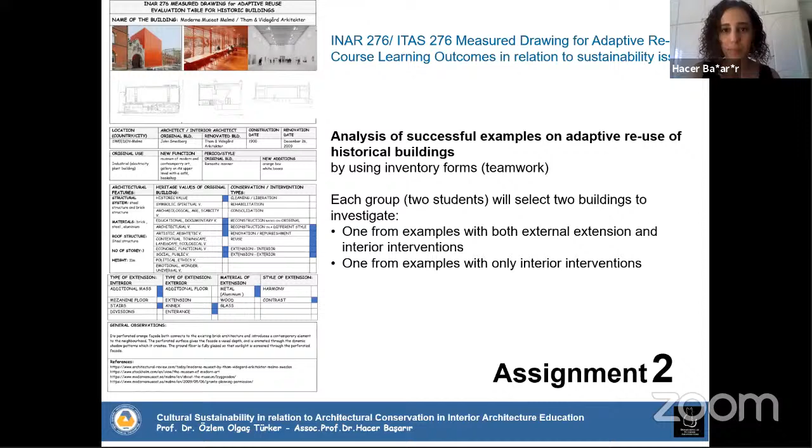Yes, Özlem hocam. The learning outcomes in this assignment include personal observation on values of cultural heritage through case studies. So they go through photographs, architectural drawings, and 3D visuals. Observations on types of interventions to historic buildings through case studies.

Critical thinking on cultural heritage, critical thinking on sustainability through continuity of cultural environments, and to learn about international agenda on conservation approaches to historic buildings and environments, conservation and reuse of historical spaces, buildings, areas, and additionally, the role of interior architecture in architectural conservation and adaptive reuse.

Following assignment 2, assignment 3 includes another presentation. Here we gave students some key criteria on conservation, and we expect them to discuss 3 different successful examples

according to these 9 criteria, which include minimum intervention, minimal loss of fabric, reversibility, compatibility of new use, explicitness of alteration, honesty and appropriateness of repair and restoration, and also, of course, sustainability and devising defensible solutions.

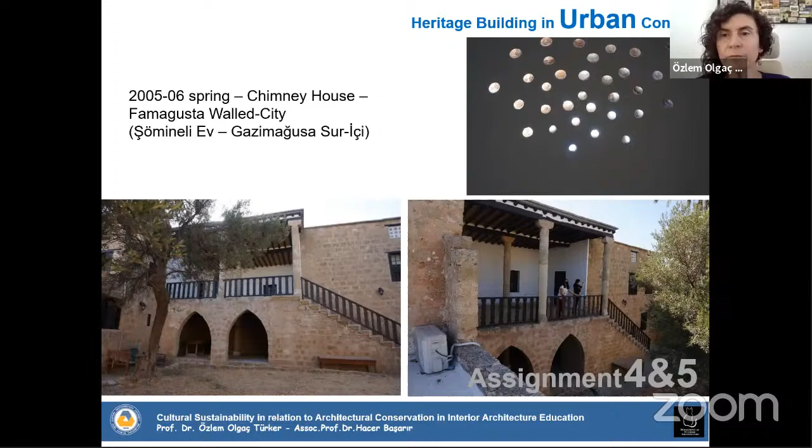Another experience is the documentation experience on heritage buildings through these on-site measurement practices. This supports students in spatial interaction in heritage buildings, using measurement tools accurately, and as Hacer Hoca mentioned, teamwork and site work experiences. You can see some examples when our students had the chance of face-to-face education and they were measuring arches or making triangulation on site.

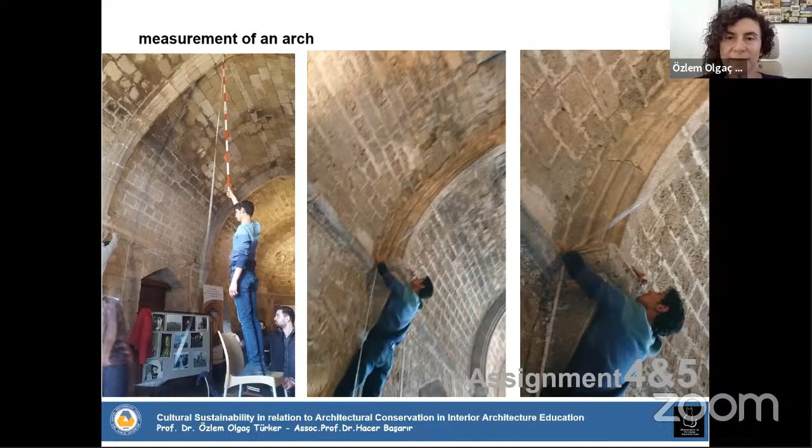Some other examples. And before going to the historic site, in order to understand the logic of measuring, we started the on-site experience from our studios in contemporary environments first, and then we took them to historic buildings.

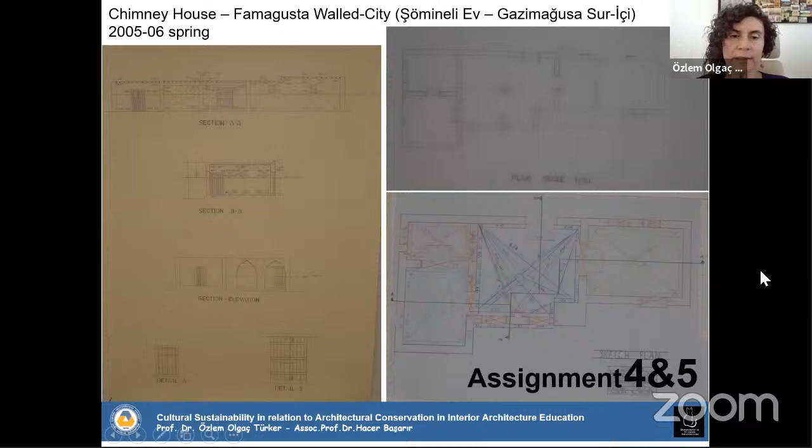The documentation experience on heritage buildings also continued with the measured drawing practice, which supports students' ability in making scaled measured drawings of heritage buildings, accuracy of drawings and the importance of this in continuity issues, and again, teamwork. Some examples can be seen here from Chimney House: sketches of students, measured drawings in scale, plans, sections and elevations. Another church example's drawings, some other samples.

And the last 3 semesters, as you know, we had an online experience, and this online experience had to support the students to achieve similar course learning outcomes, but this time through different experiences. They were not able to go out of their houses. They didn't have a chance to get measuring equipment. So we had to create new assignments for them.

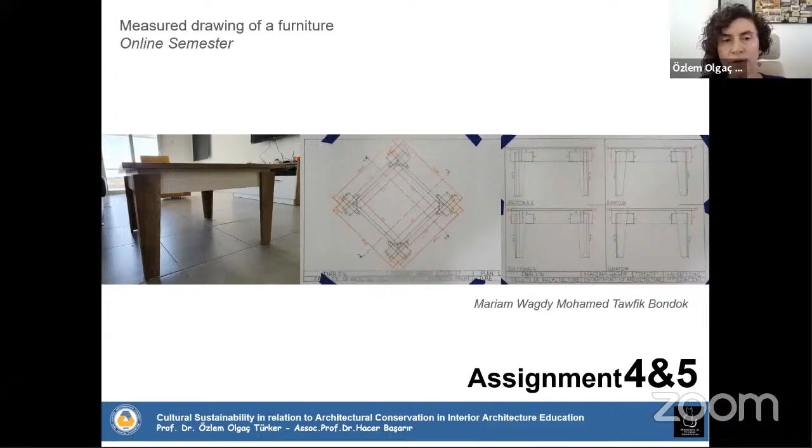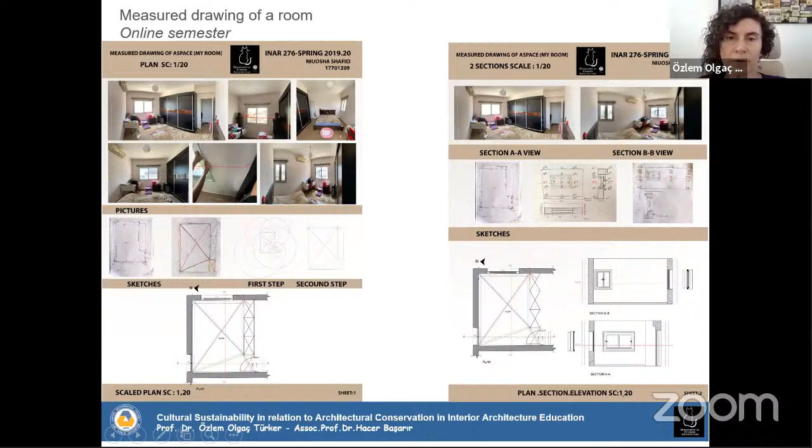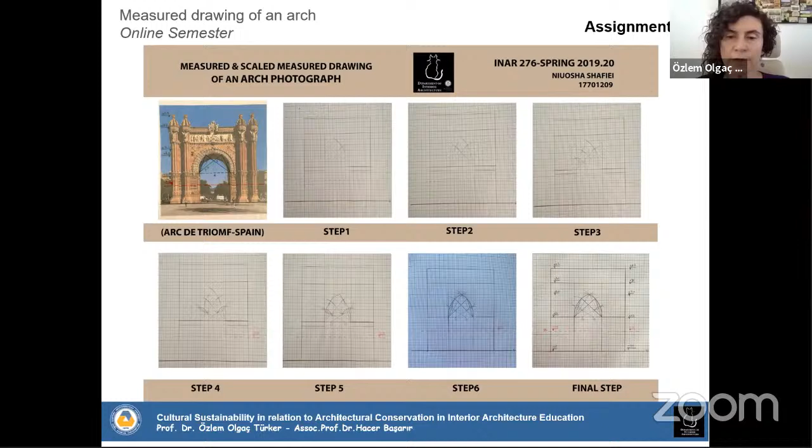So they started measuring their furniture and then their own rooms and other rooms in their living environments, dormitories or their houses. And by using the same triangulation or datum line techniques, they repeated those learning outcomes. Some examples. And because they were not able to go to historic buildings on site, we asked them to have photographs taken from just across an arch, and they experienced the geometrical methods of arch drawing through photographing.

And lastly, the jury experience was done in heritage buildings when we had the chance to, and this also supports the students' understanding of heritage buildings, the continuity issues, spatial interaction, and infusing life into these examples. As I mentioned, one example, a jury done in Bandabulya Marketplace.

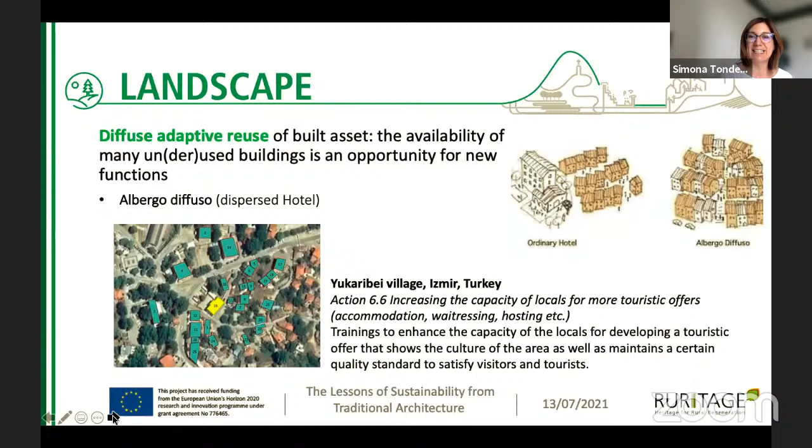Another example is the use, for what concerns the landscape integrated management, of a diffuse adaptive reuse of built asset. So in rural areas, we have this availability of many underused or unused buildings, which is also an opportunity for thinking about new functions. And an example, again, from Izmir, is the idea to plan a dispersed hotel from the idea of albergo diffuso, where to promote the availability of rooms in a small village to host tourists, and to give them an experience which is also an experience of real life, to engage them really in the community, to make them know the traditional art crafts and traditions of the community. And this is also accompanied by training courses to promote the capacity of the local citizens really to build a business from this.

Pilgrimage, of course, gives us many opportunities of reusing buildings. In one of our case studies, which is Camino de Santiago, we have seen that there are very important buildings, monuments that can be reused for these purposes, sacred spaces. But also what is interesting to see is that there are many buildings along the routes that can be reused for restaurants, bars, shops, and so on. So in the case of Camino de Santiago, we have seen how the rural heritage hub, our core place for the heritage activities, is placed in a monastery, which is also used as a hotel which can also host events. So this multifunction reuse of buildings is really working.

For what concerns resilience, of course, the reuse of buildings is one of the main features, because in our case studies, we are working with natural hazards. Appignano del Tronto suffered from the earthquake in Italy in 2016. So there were buildings that were destroyed, but this also resulted in abandonment by people. So the idea is now how to rethink buildings and also open spaces for making them available for the community. And one of the most important actions that Appignano municipality is developing is the idea of building a sort of hub for resilience, which is a mix of a scientific center, a museum, a place where to learn, to make it become a sort of full experience for the community, and also for tourists and visitors.

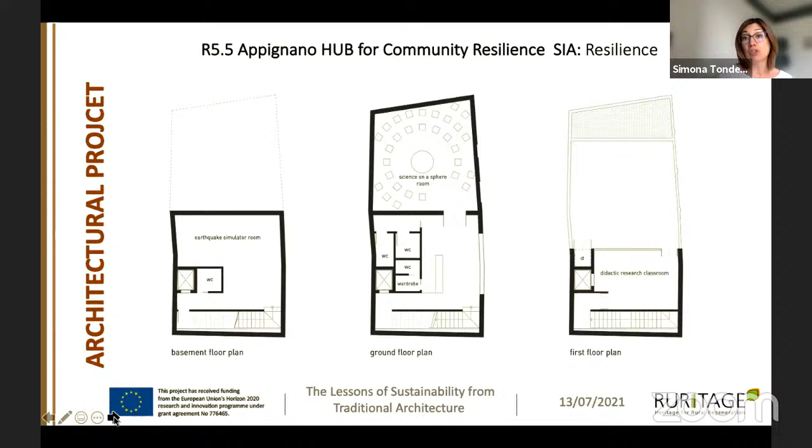So they have identified an old building. They are now planning how to use it. For example, having a simulator room for the earthquake. What we learned is that the risks should not be hidden away, but we should use them to educate, to train people to be prepared. And then we will have a place for educational activities, with didactic classrooms, so to have all the different experiences that can be offered.

For example, this is what is already present in one of our role models, which is in Crete, in Heraklion, where the earthquake simulator, hosted in the Natural History Museum, is one of the main attractions of the city. It's the second attraction after the Knossos Palace. So to say how education can also really become a point of interest. And the other one is from Trento, which is a science museum.

And then working on art and festival, we also have many other opportunities of reusing buildings and places. And what is interesting, for example, is to see how art performances can take place in spaces that are not thought to be dedicated to this, but how it is possible to have performances in open air or in pubs, in restaurants or in other venues that can really bring people to be more near to art and culture.

Another example from Slovenia is the Negova Castle, which is an important monument that hosts ceremonies, that hosts a museum, exhibitions, but also, again, our heritage hub, and where the community can find opportunities and inspiration for working on sustainable development.

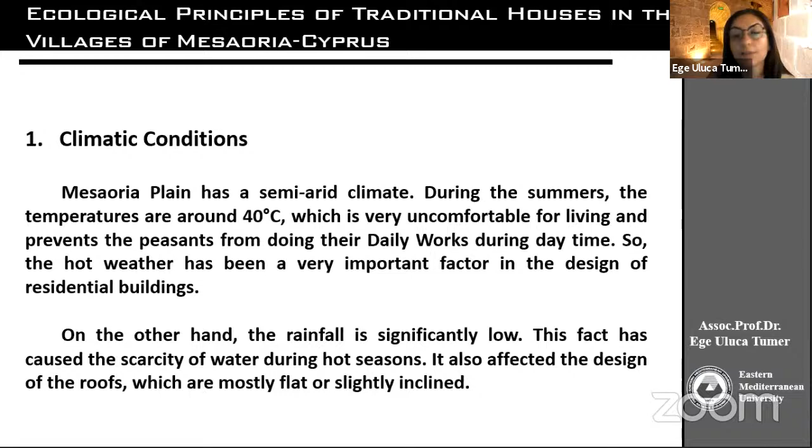As the rest of Cyprus, Mesaoria plain is very hot, especially during summers. It's around 40 degrees Celsius, and it's a semi-arid climate. It's very uncomfortable for living, and it prevents the peasants from doing their daily works during daytime. So the hot weather is really important in the design of the residential buildings. And also the rainfall is significantly low. And this fact has caused the scarcity of water during hot seasons. And it also affected the design of the roofs, which are mostly flat or slightly inclined.

And like many other villages, grain production and animal husbandry were the main economic activities in Mesaoria villages. Because of these production facilities, the rural building design developed according to them. We see big storage spaces for grains, barns and animals within the premises of the houses. We also see open spaces like courtyards, especially for dairy production and drying fruits, vegetables, tarhana, these kinds of products. And the main building material is mud brick or adobe.

This was the most available material. When you go to the mountainous areas, it differs. On mountains there are stone masonry buildings in villages, but on the plains it's all adobe. This was the easiest to produce and cheapest material in the region. The walls were built on rubble stone foundations, and they supported timber beams on flat mud roofs or slightly pitched roofs. Stone was rarely used, around doors, windows, verandas, and within closed spaces as supporting arches for the roofs.

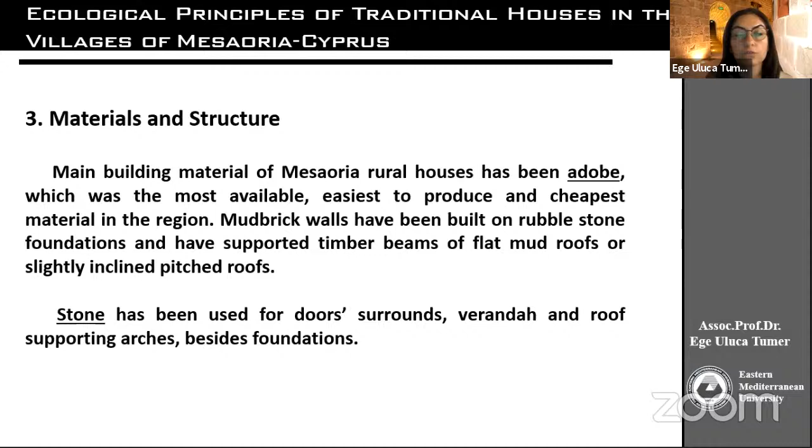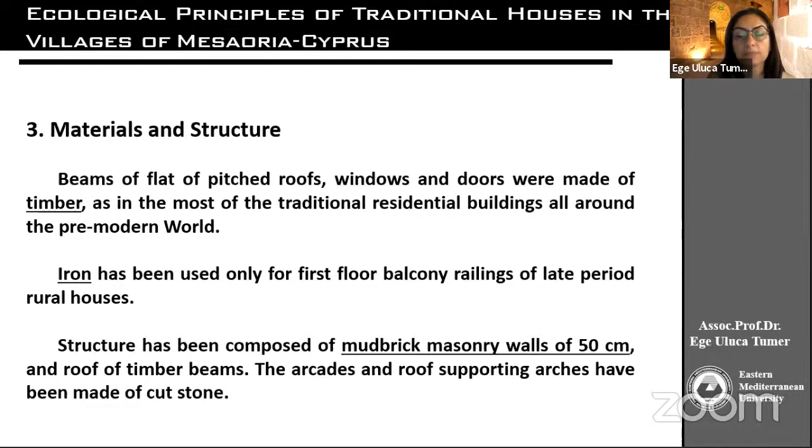So when we check the timber, as in many other Mesopotamian or Near East villages, we have flat or pitched roofs with timber beams, as in most traditional residential buildings all around the pre-modern world. Iron is very rare, only in late period balcony railings. And the mud brick masonry walls are around 50 centimeters.

So when we look at the design, we see a room is a modular unit, and besides that there is a very important space called hanay. The room was used as a modular unit arrayed in linear order on the ground floor, due to increasing demand, in early houses with an arcaded portico. If there was an upper story, it was mainly a single room called hanay in Cypriot Turkish.

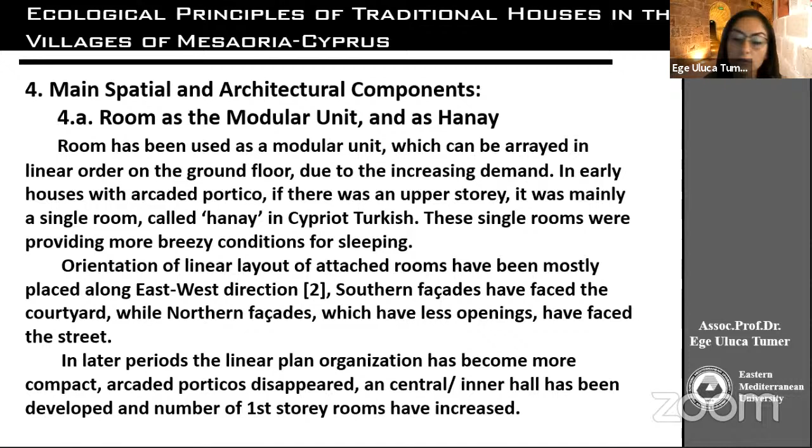Looking at orientation, these buildings were placed in the east-west direction. Just like in the first presentation about the villages of Eskişehir, they were located north of the courtyard. The southern facade faced the courtyard, while the northern facades, with fewer openings, faced the street. So the southern facade was the main facade, providing the best conditions during winter and summer. In later periods, the plan became more compact, arcaded porticos disappeared, a central inner hall developed, and the number of first-story rooms increased. So there was an evolution in the houses in this area.

Another thing: in the first presentation, it was discussed that the central room has been defined as hayat, sofa or salon. In Turkish Cypriot language, it's sündürme, a very specific name for the central hall between 2 rooms. So coming to the other main component, which is the arcaded portico, veranda, outer hall, or outer sofa.

This is the most prominent and characteristic feature of early Mesaoria village houses. These porticos, which were placed on the south, have been life-saving both during summer and winter. The semi-open spaces, as a circulation and activity area, have been used both for recreational and work-oriented facilities. This in-between area was shady during summer and caught the sunlight during winter.

Gülşen Hanım mentioned similar eaves within the houses of villages of Eskişehir. But in Cyprus, we can say that this area is much deeper, and as we say, it has arcades. The number of arches has been a way of understanding the wealth of the house owners, so this arcaded portico could be longer or shorter according to the richness of the family. This space, this arcaded portico, has been like 3 meters deep.

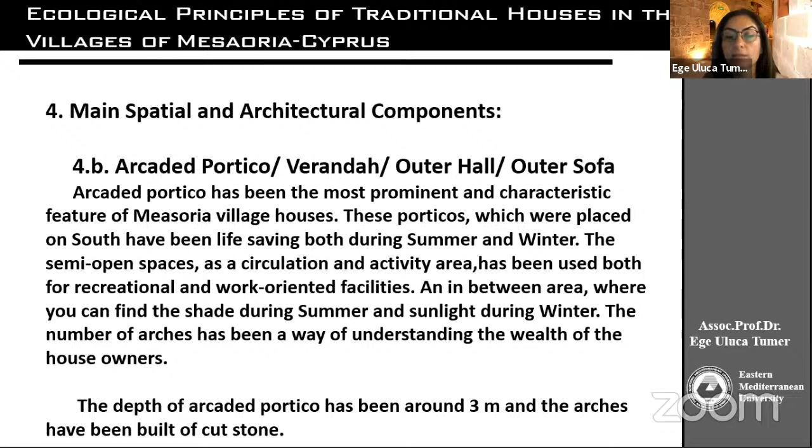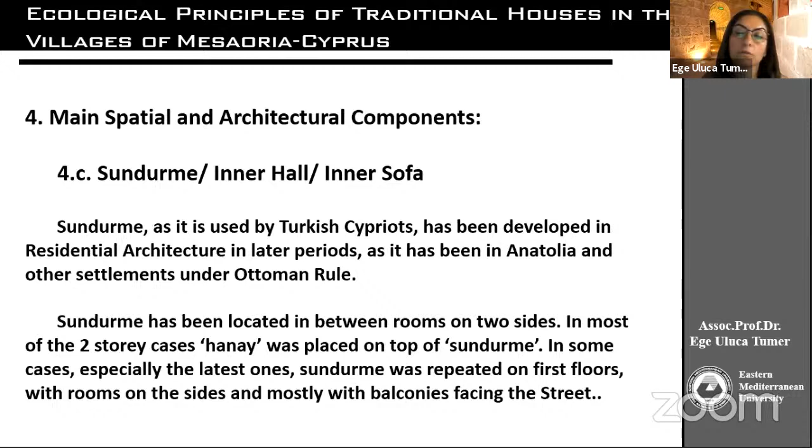And sündürme, as I have just discussed, is a special term in Cyprus. During Ottoman rule, all the houses were developed like this, a central hall in between two rooms, with the hanay on top of the sündürme. In some cases, especially the latest ones, sündürme was repeated on first floors with rooms on the sides and mostly with balconies facing the street. This is a very special supporting element, the roof supporting arches.

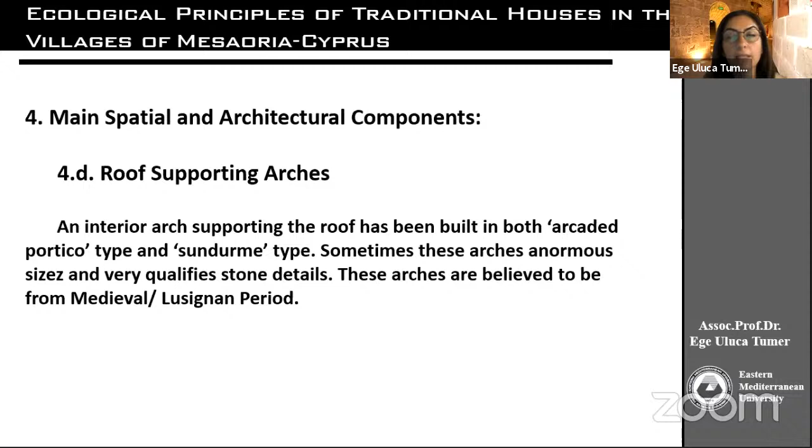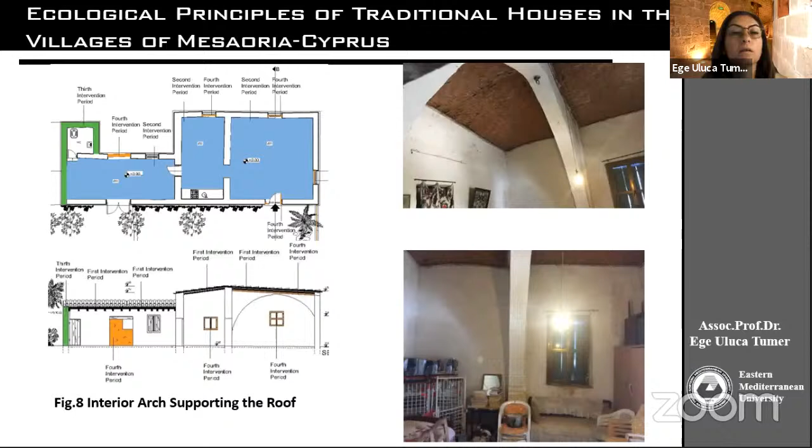These are believed to be from the medieval Lusignan period. These were for the division of large spaces within the building and for supporting the roof. We see an example here of this supporting arch, the large arches, believed to be from very early periods, and you can see the section and the plan of this house. And here is another building with this interior arch supporting the roof.

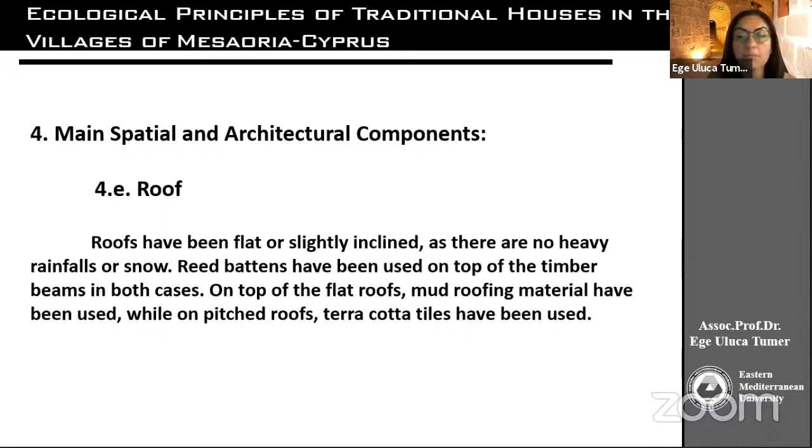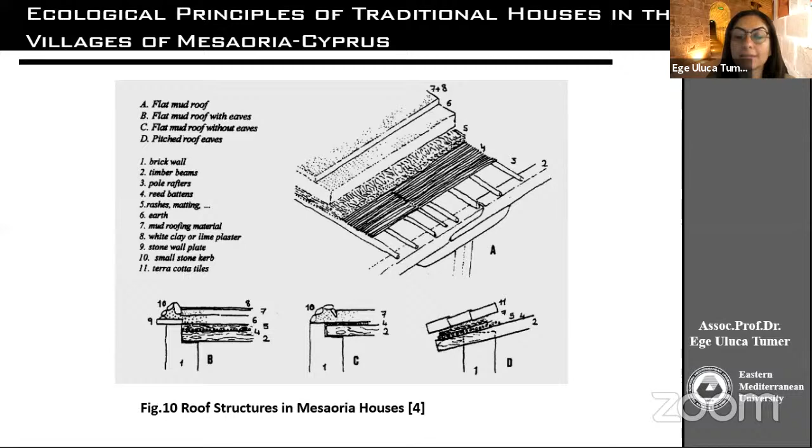As we said, according to the rain, which was very scarce, there was no need for sloped pitched roofs, so the roofs have been very flat or slightly inclined. It was used during summer, when flat, for drying different fruits or other things like tarhana. Also these flat roofs had mud roofing on top, while on pitch roofs, terracotta tiles have been used. We can see a detail of these roof structures and flat mud roofs, and also these slightly sloped pitch roofs.

There are courtyards, but the courtyard borders are not very well defined as they are in cities. They were more loose. But in general, it can be easily stated that these courtyards, besides accommodating service, WCs, wells, ovens, storage rooms, had most of the daily activities going on there, and also all the agricultural production activities.

After understanding all these details about their structure and materials, what we see about the environmentally responsive design features: first of all, the mud brick walls are very thick, like around 50 centimeters. As discussed in the previous presentations, the mud plaster and mud brick have very good insulation capacity, which protects from cold and hot weather. There are wooden shutters, which are also good for insulation, and a semi-open sündürme on the south that creates a cooling effect, especially when open on one side.

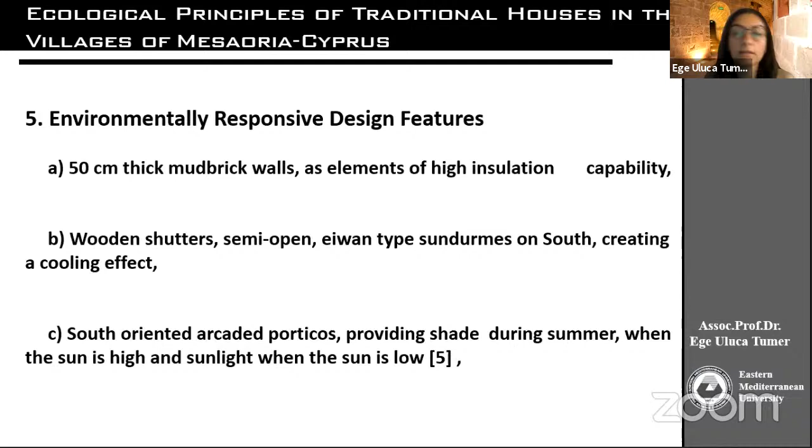South-oriented arcaded porticos provide shade during summer when the sun is high, and sunlight when the sun is low. There are openings on the west, letting in the western wind, which is the prevailing wind in the area during summer. Few and small openings on the north prevent cold weather during winter, but there are also two side windows that provide ventilation.

Mud flat roofs have high insulation capacity, with high spaces on top open on all sides, so there's no prevention of wind during night for comfortable sleep. Ventilation holes under the roof eaves and on both sides of the rooms allow ventilation through the south-north axis. It was also mentioned in the first presentation, described as Poyraz deliği.

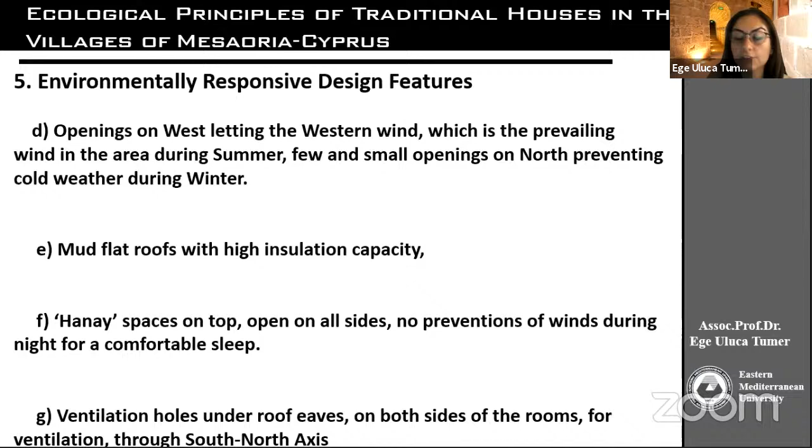We see these holes both in between the arches of the portico and on both sides of the walls, providing ventilation for the portico and for the interiors. We see one of the holes here on the left, in between the arches. When you go behind and see the wall behind, you can see another hole on top, just below the roof. Since the hottest air is under the roof, these ventilation holes help move the hot air out of the building.

There can be either one room on both sides or two rooms. And sometimes when it's two-story, in some later examples, we see the sündürme repeating on the top.

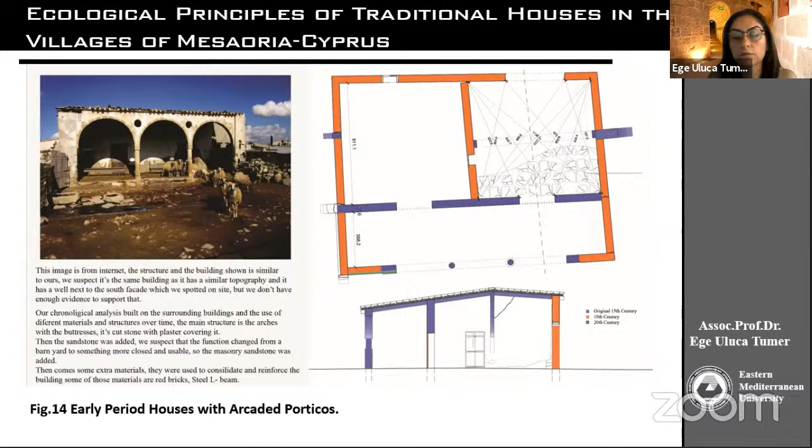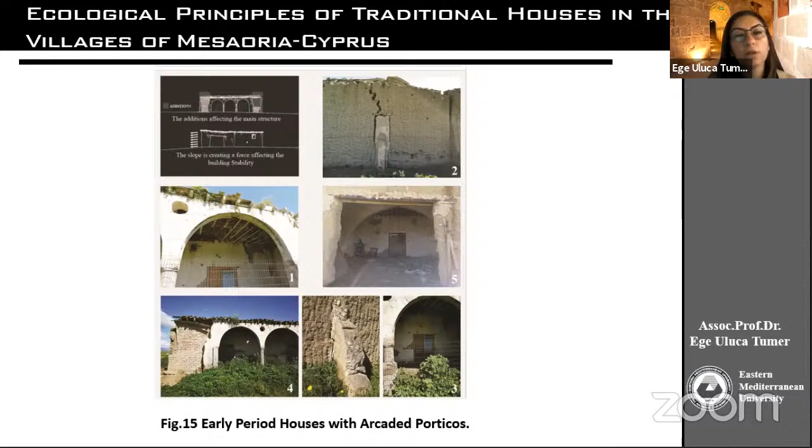So here we see the arcaded portico with the holes in between the arcs. And we can see how two-sided windows are there for ventilation through south and north. And here we can see again some examples of these arcaded porticos with the holes in between arcs.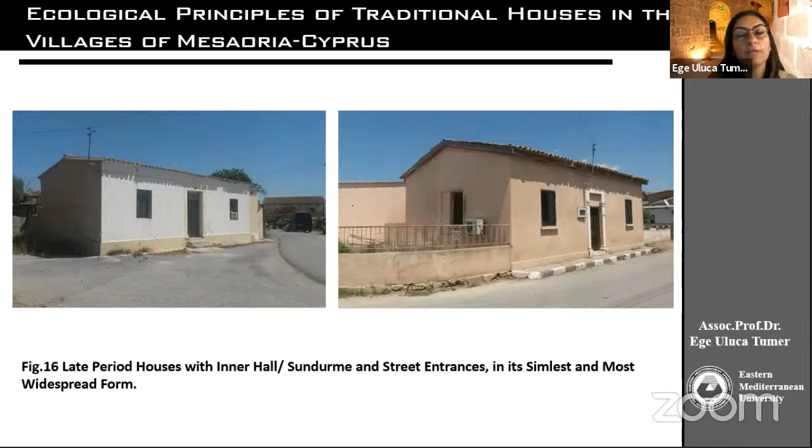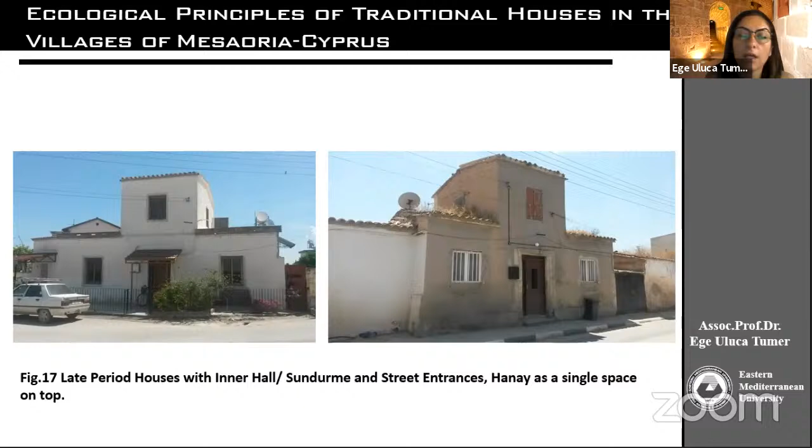And this is the later period houses with the simplest form, with the sündürme in the center. And this is again a late period example. And on top of sündürme, there are hanays as well, as a single space on top. And you can see that it has 4 windows on 4 sides. And because nothing is blocking the ventilation, these tower houses are very comfortable for a night breeze.

And sometimes you see that it's repeating. It's like a modular unit repeating one after another. And we see an example of that, again from Lisi.

And in very late period, we see that this hanay on top of sündürme also became a central hall and had 2 rooms on sides. I think in later periods, the village started to be more crowded, and this type, which is more influenced by Western styles, developed in villages and in some cities. Also in Famagusta, we have some similar types.

Thank you very much for your time. I hope it was also contributing to understanding the traditional rural buildings, special design, responding to the environmental conditions. Thank you very much.

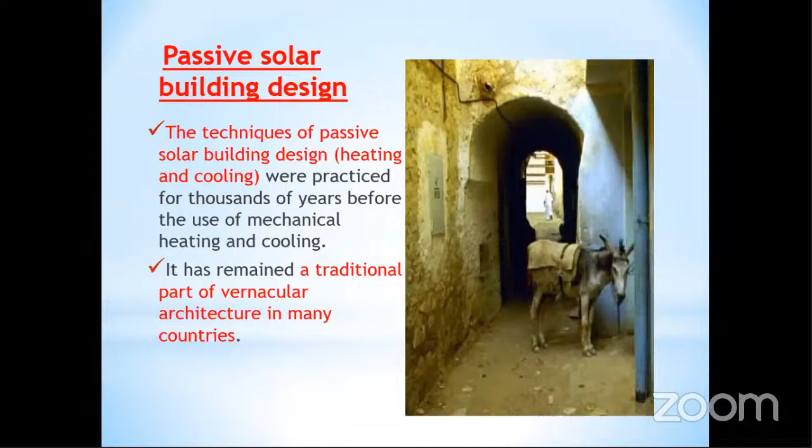Le Corbusier, the founder of modernism, in his book La Maison des Hommes said the sun provides the human being with vitamin D he needs, has a negative impact on skin and buildings, and at the same time it's an energy source. We used passive solar building design to gain passive solar energy in traditional and vernacular architecture in different countries. This is an example from Tunisia, where heating and cooling was adopted by passive solar building design.

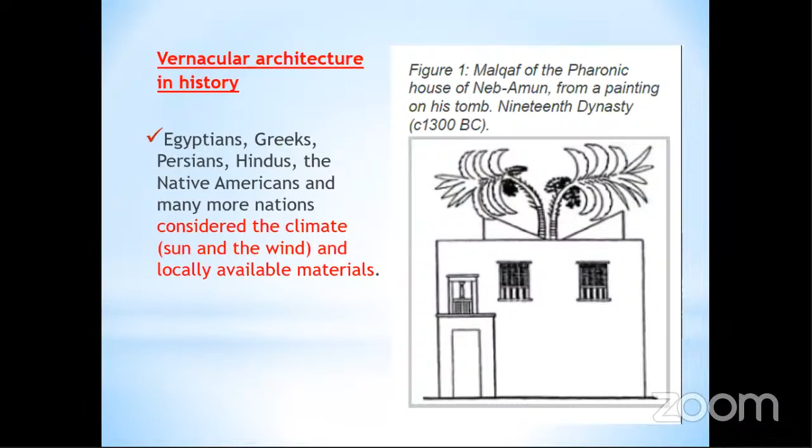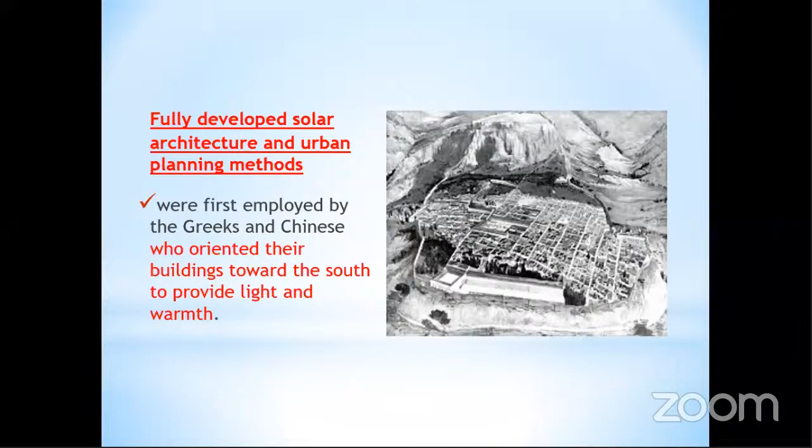Different civilizations and cultures - Egyptians, ancient Greeks, Persians, Hindus - all considered the climate in their design approach, such as sun and wind. Fully developed solar architecture and urban planning methods were first employed by Greeks and Chinese because they oriented their buildings towards the south to provide light and warmth.

Socrates, the Greek father of philosophy, known for his interest in questioning, was also a careful observer of the sun's movement. He developed the first solar house, the Megaron house, an example of the first passive solar energy use, described by Socrates. He stated: doesn't the sun shine into houses facing south in winter, whereas in summer the sun wanders over us and the roof so that we have shade?

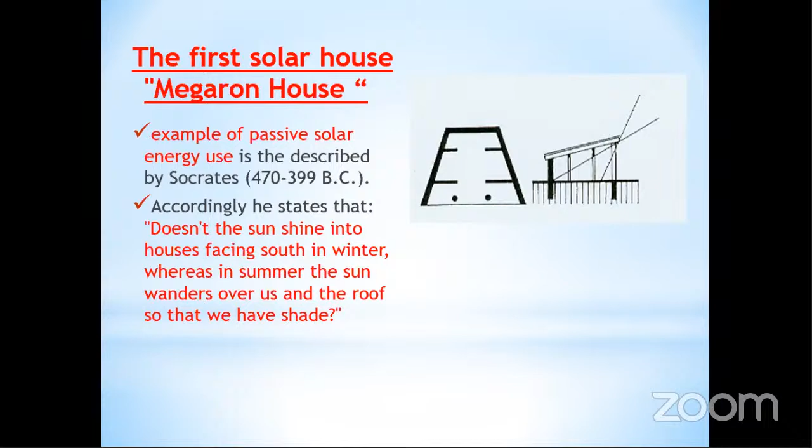You will see here - north direction closed, south direction opening to the sun, with different solar altitude or sun position; lower sun in winter, higher sun in summer. So we have sun-controlled daylight. This buffer storage area is in the north part, and we have thermal mass as buildings. There's a clear definition of sun based on the orientations.

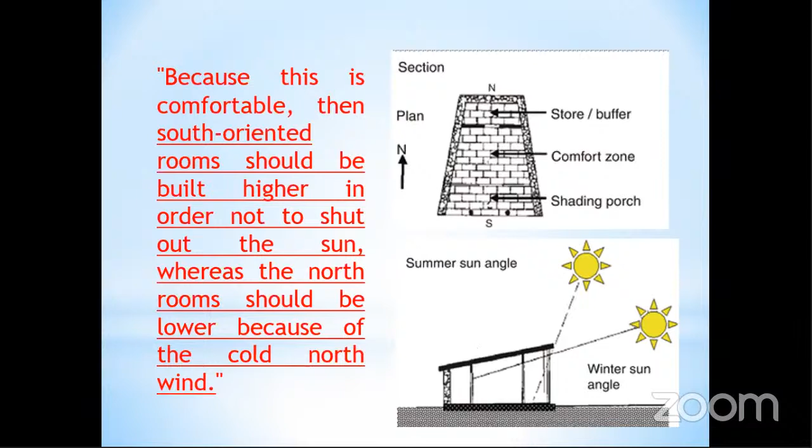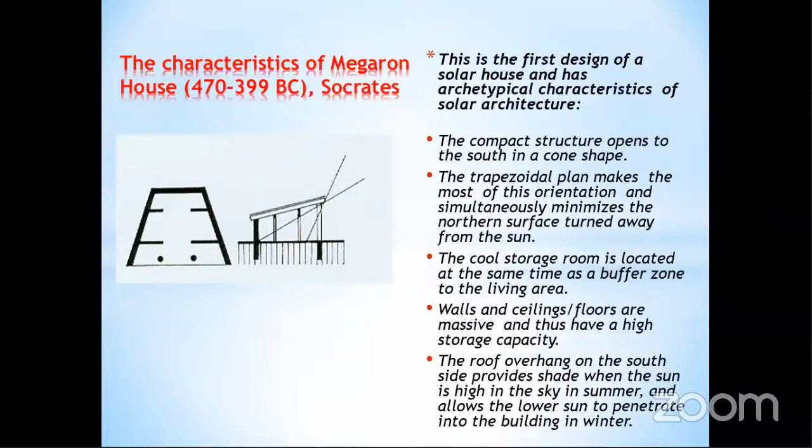Walls and ceilings, as I mentioned, have a high thermal storage capacity. Roof overhangs serve as a sun control element. This is the first archetypical characteristic of solar architecture.

So what are the timeless principles of solar architecture based on this housing concept? We should minimize the surface, open towards the sun especially in winter, and have solar zoning - cool rooms on the north side, warm rooms on the south side - with selective shading for protection against high solar altitude in summer. We should use the storage mass of exterior walls and roofs for temperature compensation.

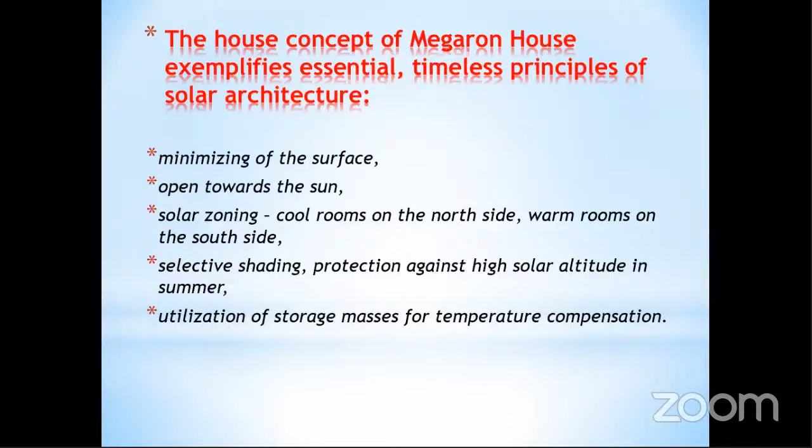Until the Industrial Revolution, glass and steel were used as construction materials. After the Industrial Revolution, in big cities like London, Berlin, and Paris, we had big problems with light and hygienic issues, and they tried to adopt sun into the interior spaces.

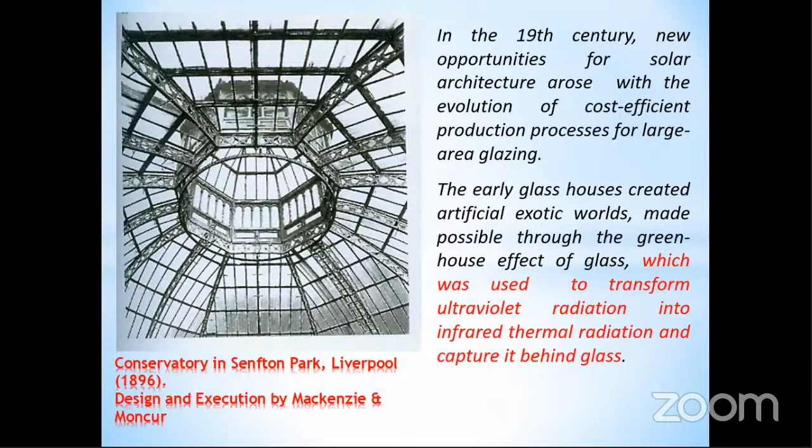In the early 20th century, artists and architects of the glass chain, so-called Gläserne Kette in German, developed crystalline structures as ideal models and designed environments against the dark and unhygienic cities caused by the Industrial Revolution - until, unfortunately, the 1930s, at the beginning of the National Socialist Nazi regime. It was stopped at that time; they had developed autonomous outcomes in terms of supply possibility, but the Nazi regime brought these steps to an end. Their credo was transparency, light, air, and sun.

After the Second World War, there was new construction of cities and housing. People needed accommodation, and we ignored passive solar energy, basing our heating, cooling, and lighting demand on fossil fuels. The Club of Rome in 1972 said: let's return to traditional building forms, the use of natural materials and renewable energy resources like solar energy, and have an intelligent use of it. Solar energy from that time remained a constitutive movement.

Until the energy crisis of 1973, after the Yom Kippur War between Israel and the Arab countries, the warning of the Club of Rome became a reality.

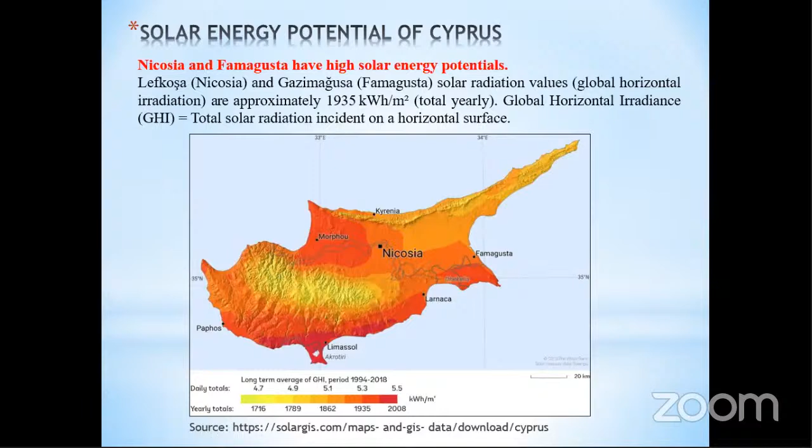So we developed in our graduate elective course, Arch 577, Solar Architecture, an analysis of historical buildings. These buildings are converted churches, which were converted to mosques during the Ottoman period, and their ability for energetic adaptation.

St. Sophia Cathedral in Nicosia, today called Selimiye Mosque, or Bedesten, the Old St. Nicholas Church, or the Cathedral of St. Nicholas in Famagusta, today the landmark of our whole city in Famagusta, Lala Mustafa Pasha Mosque.

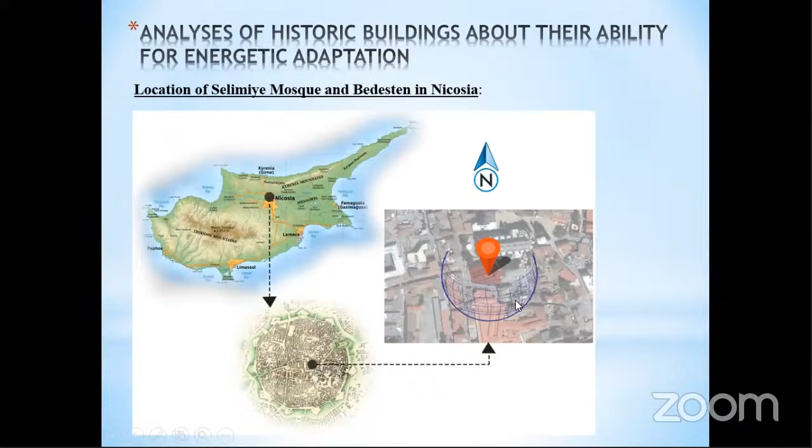If we look to the location of Selimiye Mosque and Bedesten in Nicosia, it's in the walled city of Nicosia. We can see the sun path diagram, which starts from the east to west. It is important to check exactly how the sun path is developed.

This is the location of Lala Mustafa Pasha Mosque in the walled city of Famagusta in the eastern part of the island. Lala Mustafa Pasha Mosque is here again in the center, beside St. Peter and Paul's Cathedral.

So the problem statement is the lack of the application of sustainable means of energy consumption in historic buildings. We are trying to shift, because of these sustainability issues, to renewable energy sources. If we continue with fossil fuels, of course, the carbon dioxide emissions are increasing. So we should get rid of these fossil fuels and move to solar, wind, and other renewable energy sources.

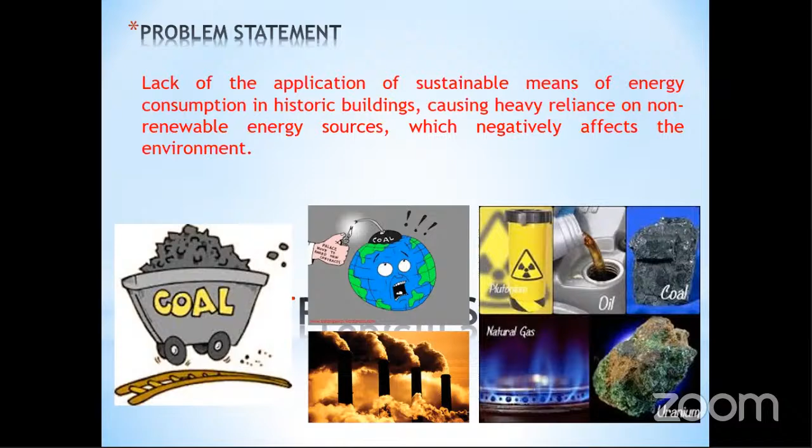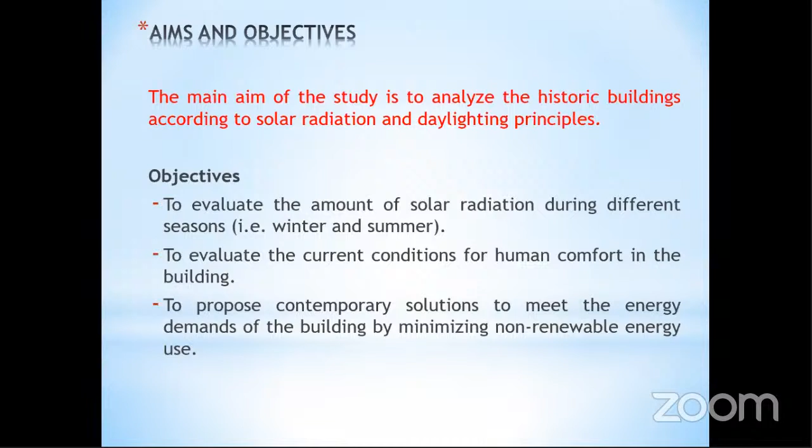So the main aim of the study is to analyze historic buildings according to solar radiation, because we need this sun path diagram, and daylighting principles. We are trying to evaluate the amount of solar radiation during different seasons, winter and summer. We are trying to evaluate the current conditions for human comfort in the building. We are trying to propose contemporary solutions to meet the energy demands of the building by minimizing non-renewable energy sources.

Students use the following methods to carry out the research: documentary study, observation is very important, and of course, for visualization or simulation, AutoCAD, SketchUp, Photoshop, Lumion, Ecotect, which at that time in 2016 was available, Daylight Visualizer, and Sefaira.

So the following research questions were evaluated: how much solar radiation penetrates into the interior space of the historic buildings in different seasons of the year? What are the current conditions for human comfort? Which contemporary solutions can be applied in historic buildings under preservation orders?

This is very important because it's a sensitive issue to work with historic buildings. There are preservation orders. How can we meet its energy demands and reduce the reliance on non-renewable sources? How can we apply this solar technology on the historic building without interfering too much with the preservation orders?

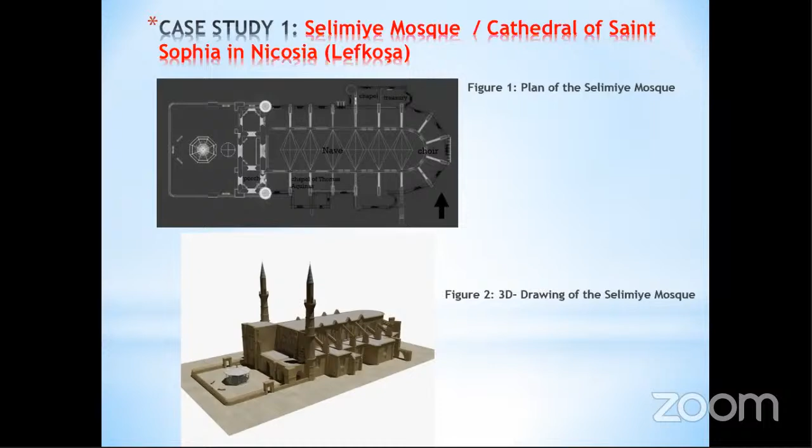So this is a plan of the Selimiye Mosque in Lefkoşa, in Nicosia, with 3D drawings which were developed by the students. You can see it's a Gothic building built in the Lusignan and Venetian time period.

So the main concern of the students' observation was heating in winter. If you ask the Cypriots, they will tell you, okay, we have only 2 months of winter time. The high heat storage capacity of the exterior walls is working as thermal mass, so we have no high heating demand, but cooling in summer is a big problem.

The solar ornaments of the windows are blocking the high amount. I will show you some photos. Ventilation can be boosted by roof-hung fans and by cross ventilation. Electricity needed for this will be provided by PVs.

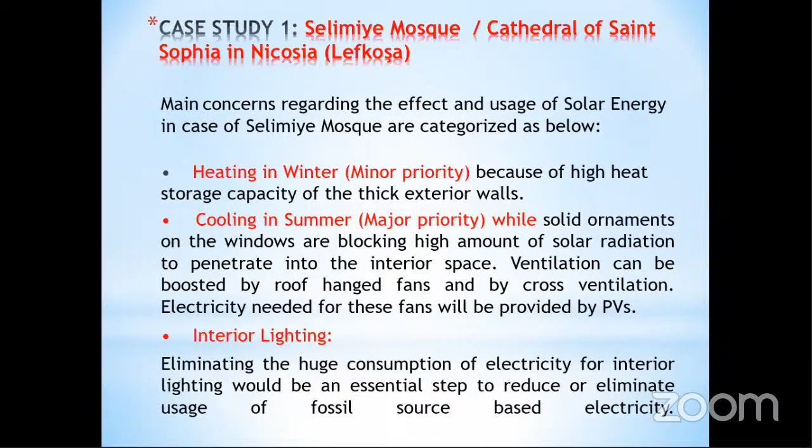The lighting problem is the huge consumption for interior lighting, because in daytime they are using the lighting. You can see here it's switched on in the daytime, and these ornaments are blocking the penetration of solar daylight into the interior spaces.

This is outside, and of course these evergreen trees should warm up the thermal mass exterior walls. But if they are evergreen, they can go. Maybe we can replace them with deciduous trees.

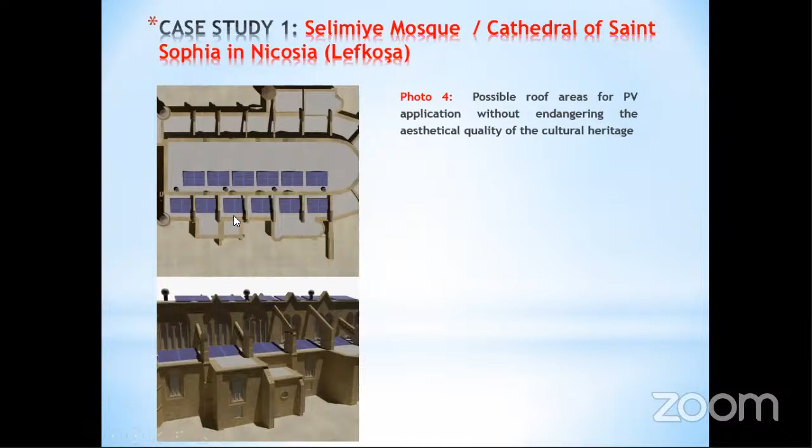Let's go to the possible roof areas. How can we apply for the lighting issues and for cooling PV applications, solar panels on the roof? These are some parts. We should be very careful because I'm not sure what are the preservation rules. How can we adapt? Because there should be a coordination between the conservation, historical conservation issues, because we are trying to integrate these on the roofs.

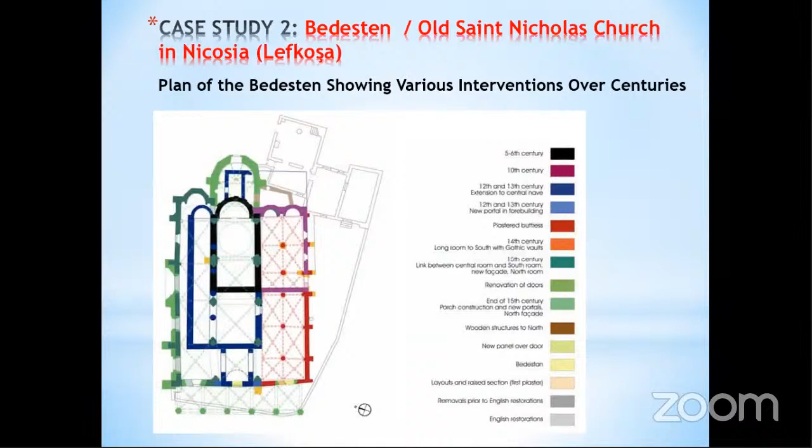Let's move to the Bedesten. Bedestan was developed in many centuries in different areas. He made a facade analysis of different orientations. Spatially, we tried to measure the area openings of the windows and the total surface areas. South facade, northern facade, eastern facade, western facade. What are the benefits? What is lacking? Is there any daylight problem, or can we cool the spaces?

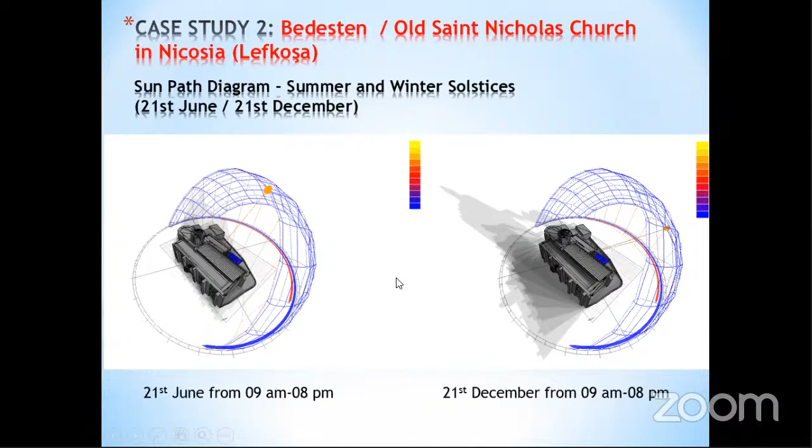Economically, we found out that the thick stone walls, approximately 40 to 50 centimeters, are a good thermoregulator. During summer, there is a high cooling demand, while in winter heating is high. Heating is augmented with the use of gas heaters. Cooling, no artificial cooling system exists in this building. Insulation is not provided within the building. Shading, timber element used as shading, ventilation is sufficient.

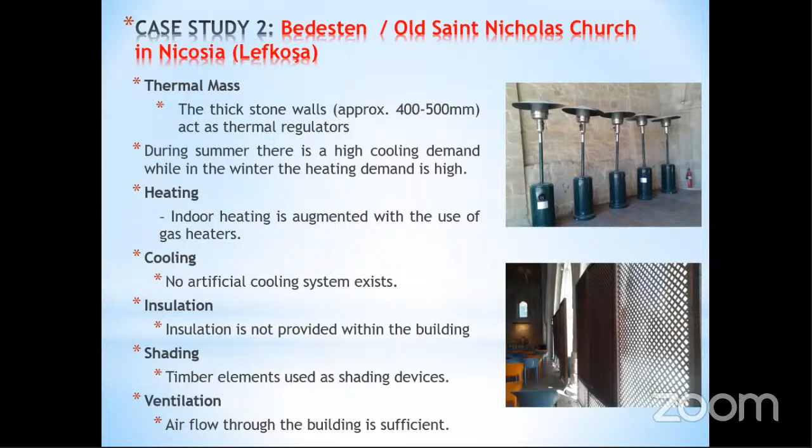So then we check the natural daylight, which penetrates through the openings, mainly on the south and western facade. The glass arches on the south facade, and also on the western and south, are the main source of daylight. Towards the east, there is limited natural light. So this is the situation. Daylight factor is the unit that we are going to measure.

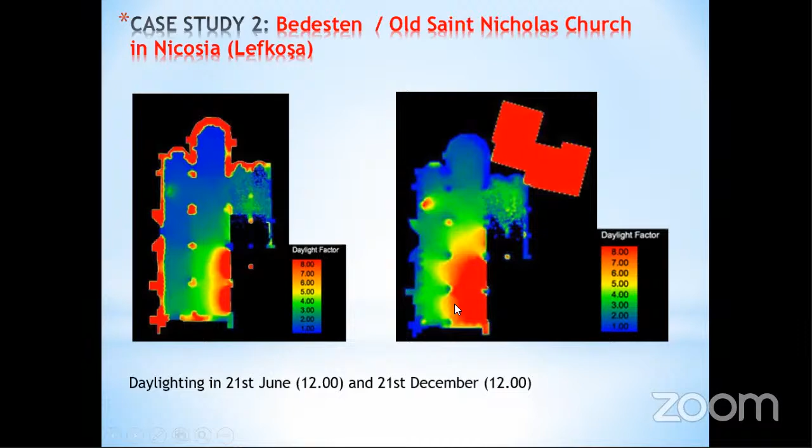You see these window areas, we have more than 8. And these areas are sometimes lacking daylight, especially in June and December, because the solar inclination is low, so we have more benefit for passive solar energy gain in winter and daylight. So a simulation was also done for equinox time. So these are some suggestions for the case study.

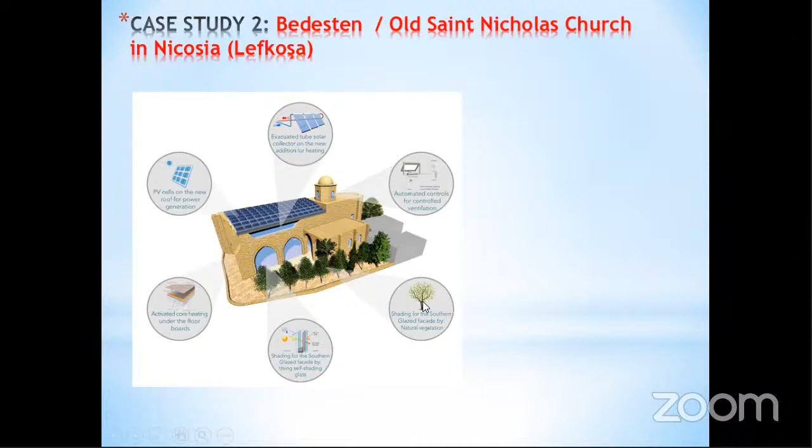Evacuated tube collectors can be adopted, PV cells on the roof, activated core heating under the floorboards, shading for the south glass facade by using self-shading glass, shading for the south glass facade by natural vegetation, automatic control for controlled ventilation.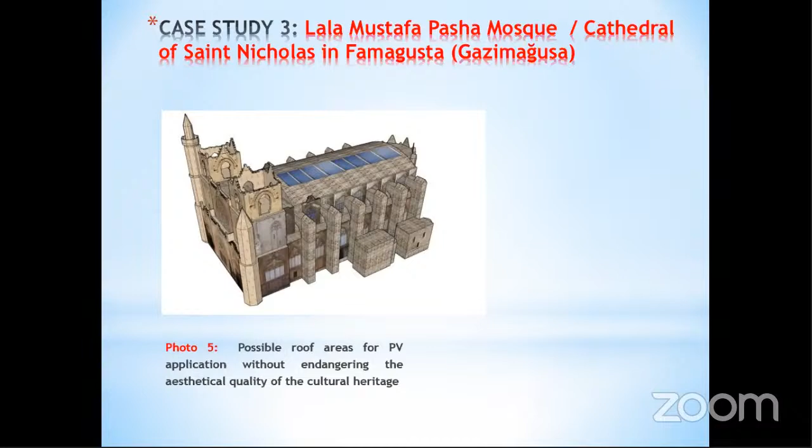So our conclusion: adaptation of solar technology is a big challenge for the historic buildings in Northern Cyprus, considering very important preservation orders. It is a fact that installation of most of this technology is quite expensive, but in the long run, the benefits outweigh the initial costs. Using this technology with passive means of heating, cooling, and lighting will indeed contribute to helping the country as a whole towards a more sustainable direction in its development.

These are some references. I have one Italian reference, which was developed for St. Nicholas Church in Famagusta. And thanks to the students who supported. We had international master's and PhD students who worked on this project.

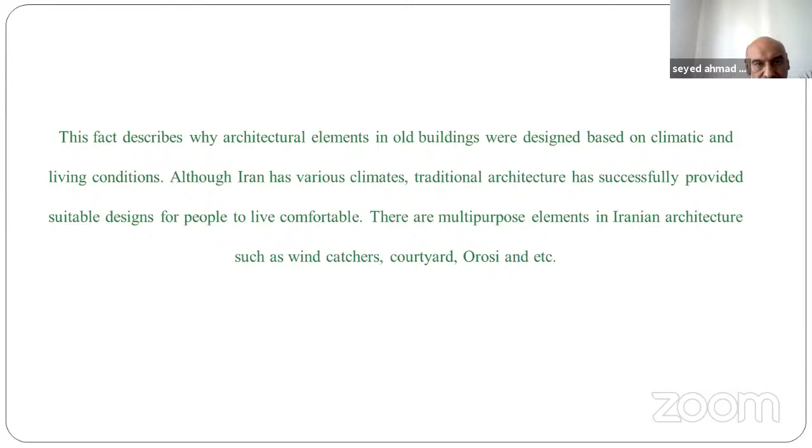Yes, I skip this and go to some samples of architectural elements that we have in Iran. For example, the wind catcher, or badgir as we say in Persian, could, for example, solve the problem of heating in the...

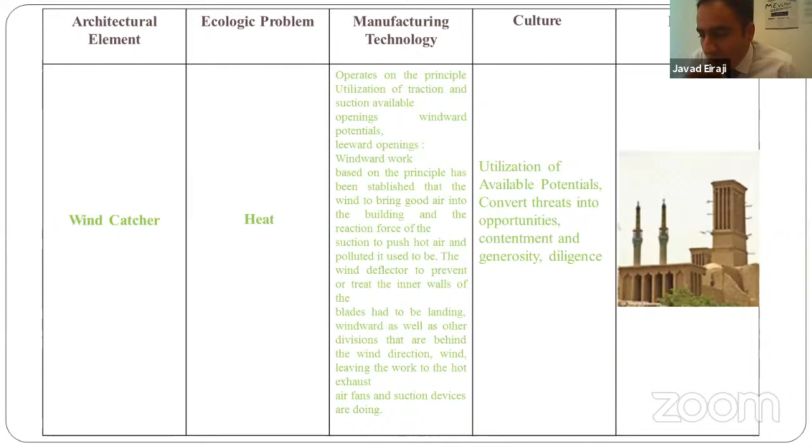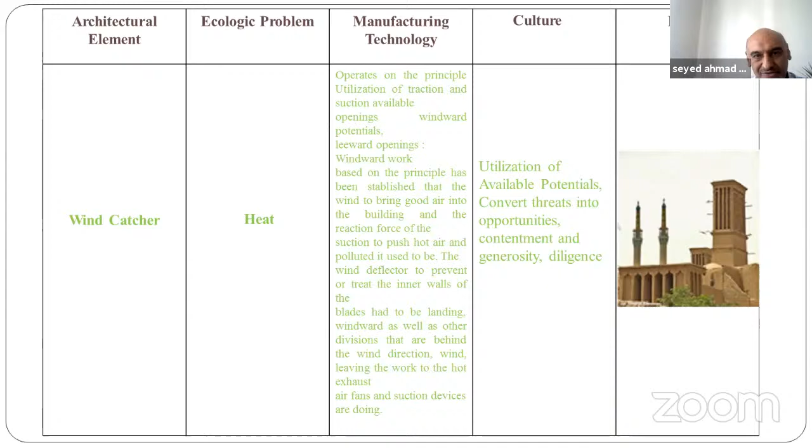To circulate the heating, and you are, I think, familiar with this kind of technology that we have. And also Gowdal Baghcheh, that is in the middle of the traditional houses, that helps to control the extremes of cold and heat in the Iranian houses, and also the courtyard that is in the middle of the houses in the central part, and it could also moderate the harshness of winter weather and also the hotness of summer weather

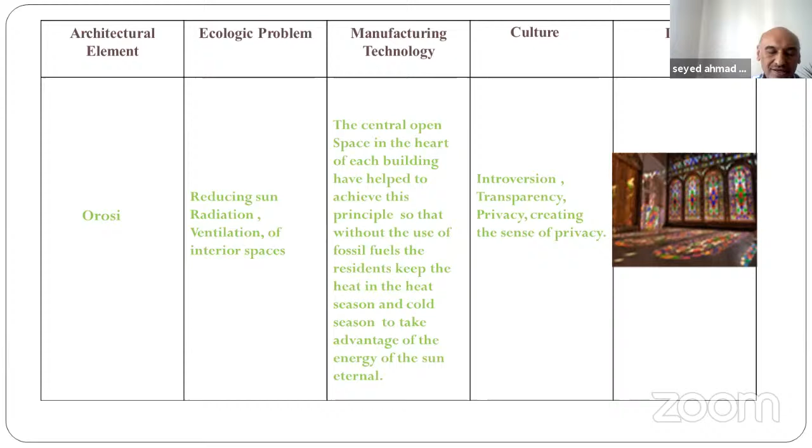and so on. And also Orosi, that is some kind of windows, pencere, that we have, and it is built with different glasses in different colors and also with different shapes, and it can also have the duty of reducing sun radiation, ventilation, and making the interior space nicer, and also sometimes for preventing some of the insects from entering the house and so on. And the last one is Shibak, that is, for example, designed handicraft windows that we have in our traditional houses.

This was my presentation, and as a conclusion, we can say that Ecotech Vision is a pure scientific view that we can see in Iranian ancient architecture. Ecotech is literally a return to the past based on today's science and technology. The producers of Iranian past architecture believed that making a perfect environment for human beings' lives is essential, and assessing Iranian architecture history demonstrates its constant development and growth. Thank you for your attention, and thank you for your participation.

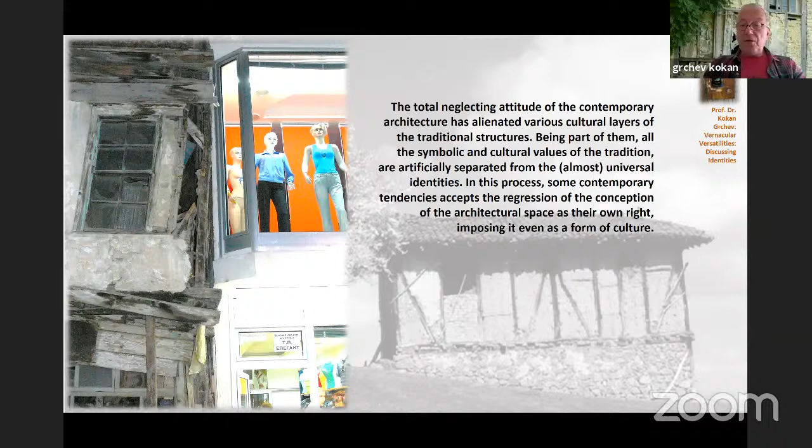That's why I'm going to talk about three typologies of vernacular or traditional experiences, especially in my country, although we are going to find the same repertoire of buildings starting from Portugal and Spain in the west and moving through the Mediterranean and far to Mongolia and China, wherever you want. Many of those items are going to be recognized because of similar cultural processes, migrations, or so.

I will talk about universal, primal, primitive, sustainable elements that are recognized on a really wide territory without borders in general cultural manifestation. Then I will introduce some of those transitional types, which show how the costume of the architecture is going to be changed on top of the content, which is not going to be changed.

These transitionals are interesting because they are culturally mediated. They are influenced by transmissions and migrations, and they are localized with specific and visible local languages in architecture, which is encouraging further development. In the second half of the 19th century and the entire first half of the 20th century, we have the so-called binary coded architecture.

I used the term binary coded architectural style for the first time when I wrote my book about the ergonomy of architectural style. This is a style appearance which is the result of two or more components or intersections that are moving far from the origins and producing a third, self-defining entity.

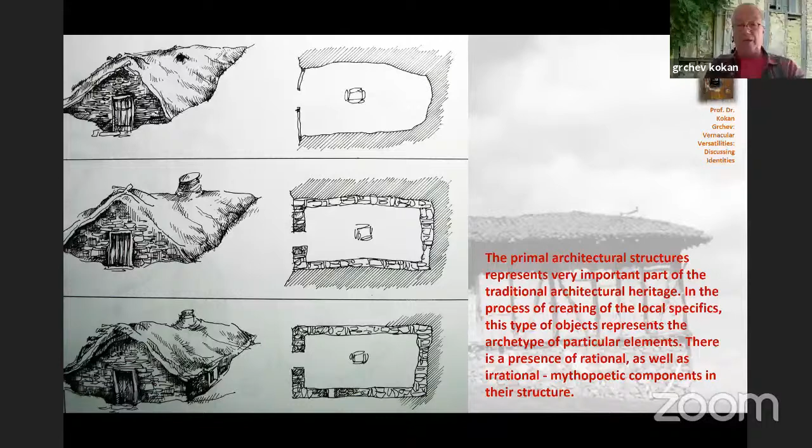If you search the internet today, you will find them all around the world. We still have them alive in those geographies I'm talking about, using primitive, local materials, responding to the concept, far away from any general stylistic expression. They are localized, expressing the first touch and honesty with the material, and the organization of the courtyard and the buildings themselves, usually made of local materials with the same organizational patterns within the buildings.

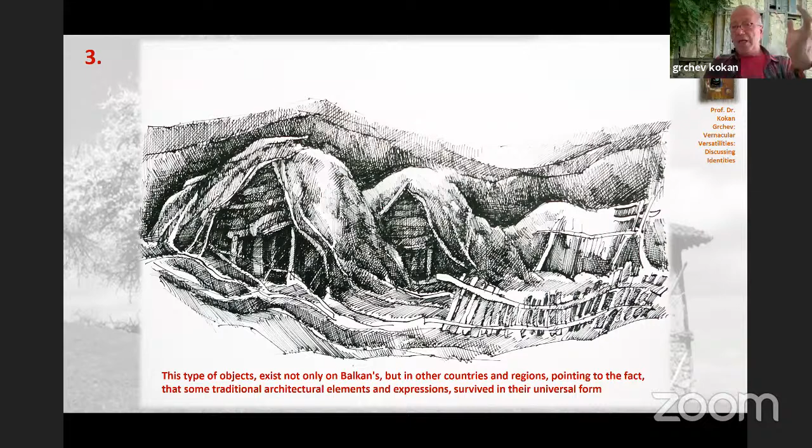You will see varieties of them. It is possible to talk about each one separately, but what I want to show you is that people are capable of constructing them today.

These are photos of quite newly constructed buildings, showing that this is almost a genetic issue. People know how to do that, but they are not going to do this in some new urbanized environment. They will do it in the mountains, for the shepherds, hidden from the eyes of others, which is completely opposite. Previously, they were done to face the eyes of others.

As you can see, this is possible even today, but the reasons why and how the symbolical and ritual practices and values of these buildings are understood and transformed stand on a completely different standpoint. As you can see, on some of them there are almost visible traces of new adaptations.

With the transitional forms, we see a kind of lack of those symbolical universal values of vernacular architecture, as I talked before. I'm going to show you how these simple, non-recognizable buildings started to look like houses at the end. This is the first costume that the buildings take on top of them, to respond to a more different contextual cultural environment.

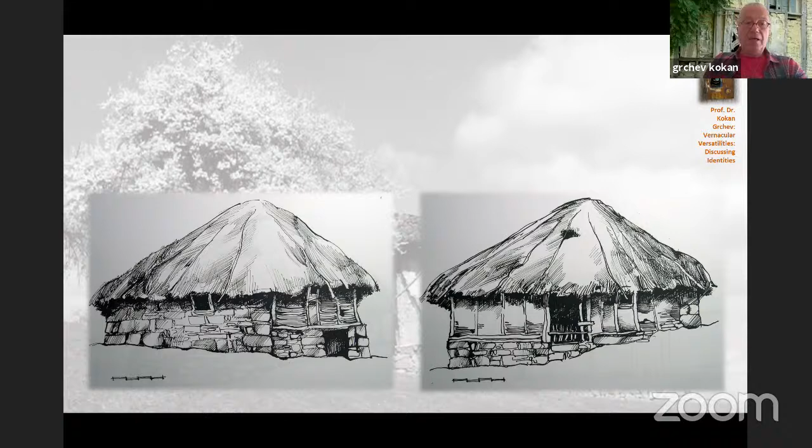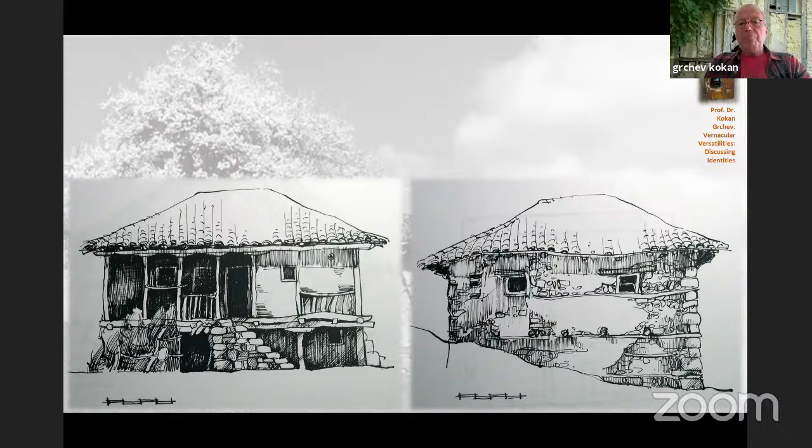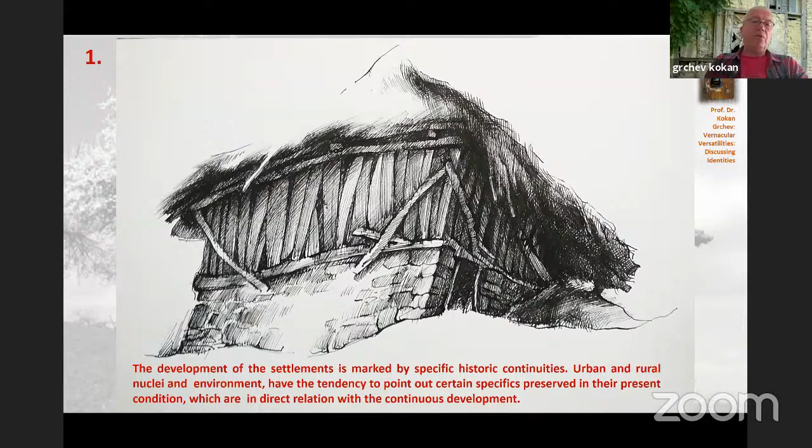This is the time of the first migrations of entire groups of people inhabiting houses from other groups, trying to arrange their own spaces inside, trying to adapt, reshape, reorganize, and change the costume of the building, while keeping the inside organization almost equally symbolically strong and anthropologically clear, to be understood as with the primal compositions and primitive buildings that we saw before.

When you see them in situ, you will understand that they saw something, they wanted to achieve something, but they stayed trapped in this journey from the primitive and primal to something that should show a different cultural level of the inhabitants of those buildings.

Those primitive forms are clear geometrical ones with pure materials, but on the way to becoming something completely different. You may find a lot of analogies with a huge amount of production, especially in the Mediterranean region, because these are obvious experiences from there. But without seeing the context of these buildings, you cannot understand the originality of their appearance.

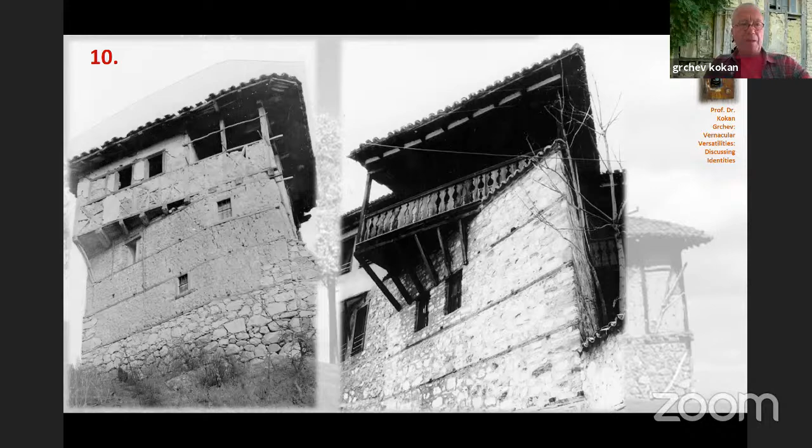There are varieties of them, believe me, and they brought the entire traditional architectural production to the recognition of the so-called local schools of architecture, which can be recognized in the first and second half of the 19th century. But this also points to developed skills, manners, and practices, to construction groups and people who were walking around the Balkans, traveling and building, bringing back home different elements from varieties of centers at that time.

That was Istanbul and Thessaloniki, with developed markets of decorative elements. Once brought to the site, those decorative elements started being applied on the same buildings that didn't have any kind of stylistic trace applied on top.

This is why it is difficult to talk about them today, because it looks like Western style influences, but this is really binary coded, because in the contact between the traditional patterns and the then-contemporary applications of decoration, it becomes something third, which is not even eclecticism of its kind. It has a tendency to show the new costume. The class of people living in those buildings have mixtures of costumes. You should see that theater of urban applications.

So this is the pure transformation of the society, of the culture, of the architecture that follows all these steps side by side. These are wonderful examples of to which extent at the beginning of the 20th century, this traditional architecture with no authors was able to select elements, to put them together, and to produce and put in front of us buildings with very consistent architectural style specifics.